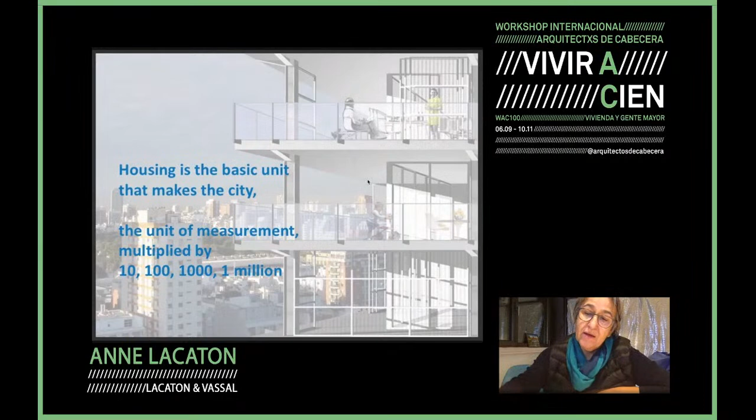producing housing - the cities, stakeholders, everyone - as an essential aim when programming, thinking, and designing housing. So it's important to define clearly what's the idea of inhabiting. Making housing is not just making a space that fulfills all the standards, the requirements, that complies with all the laws, regulations. I think it's much more than that.

Inhabiting beyond the functional means freedom, comfort, generosity of space, of uses, of natural light, of view. So it's very important because housing is a place where everyone in the world lives or should have to live. That's why for us it's an important care for the quality of space, and the word of pleasure of being in a space is very important, because pleasure for housing is a kind of - it's political.

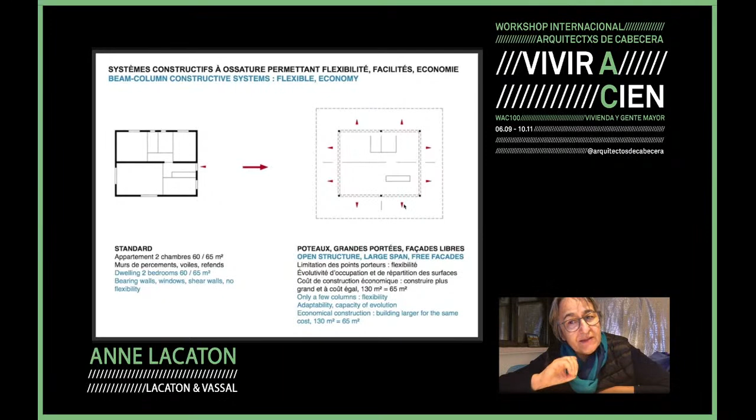So it means also adaptability, capacity of evolution, but also economy, because this prefabricated system of construction allows us to build larger for the same cost. It's clear that if we talk about generosity of space, it should not mean more expensive, because then it's not affordable anymore. So it's important to have this generosity of space in mind, but at the same time define the conditions to make construction economical, so that it allows us to afford this generosity of space.

This way of building, of thinking the space, is also very efficient in terms of energy saving and climate use, because it allows us to create intermediate spaces adapted to any climate, any country's conditions. If it's cold in northern countries, if it's hot in more middle countries, it also allows for passive energy, passive construction.

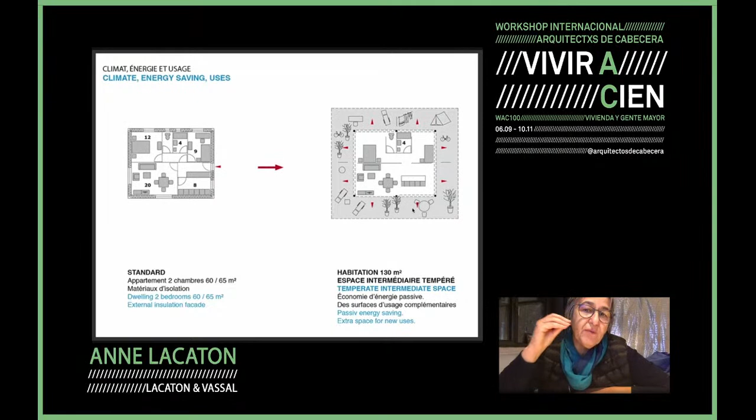At the same time it gives this extra space for new uses. So we always have in mind this extra space, this facility of moving, when we are designing housing. You mentioned in the presentation the first house we did as young architects.

It was in 1992, and our goal was really this: to provide for these people, since this family had a very small budget, and they could only afford a kind of standard house of 60-65 square meters. For us, we were really obsessed by the idea of providing much more than that, because we were absolutely convinced that living in small space was not good conditions of life.

So we worked very hard to design this house with extra space. It's a house of 180 square meters, with 60 meters as extra space, like this greenhouse, and 120 inside in the condition of habitable space, heated and so on.

But this house is also really turned to the outside, it works with climate. It also allows, in this combination between inside space—which is in a way constrained by the program of spaces like living room, kitchen, bedrooms—and the extra space, which is free of program, to create the place where appropriation can happen. In this combination between program space and unprogrammed space, something really interesting happens, which is the freedom of the inhabitants.

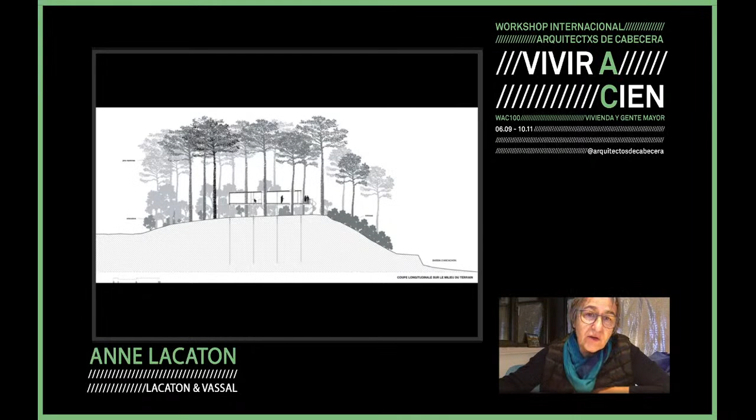So this is the section, and you can see that we did very light, deep foundations in order to keep the ground with no digging, nothing, but just like needles, and all the stability is made in the construction and is not made inside the ground. So the house is raised up, so we can catch also the better view on the sea.

So another project that we did some years later after the first house, it's the first project for so-called social housing in the city of Mulhouse that we completed in 2005.

I must say that social housing, social is probably not necessary to say, because housing is social in itself, and we should not have to add any categorization of anything to social housing, because in fact it's a very bad thing to introduce any kind of category, any kind of difference in typologies in housing: elderly housing, social housing, affordable housing, more affordable housing.

So all of this, for me, is very bad, because the consequence is only to create more and more standards, while in fact we should always start from how to think the space to live.

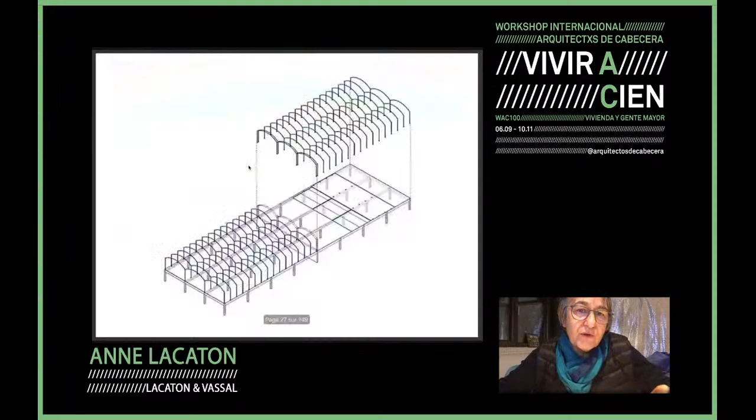So that was the basic structure, which was built like a big loft in the most efficient conditions, and this is the final result. Then the work was how to divide this construction into 14 flats.

We defined some rules to divide this place. The rules were that every dwelling should have at least 2 orientations, even opposite orientations or corner orientation, and that every dwelling should have a space on the ground floor and a space on the first floor, to profit from the 2 atmospheres.

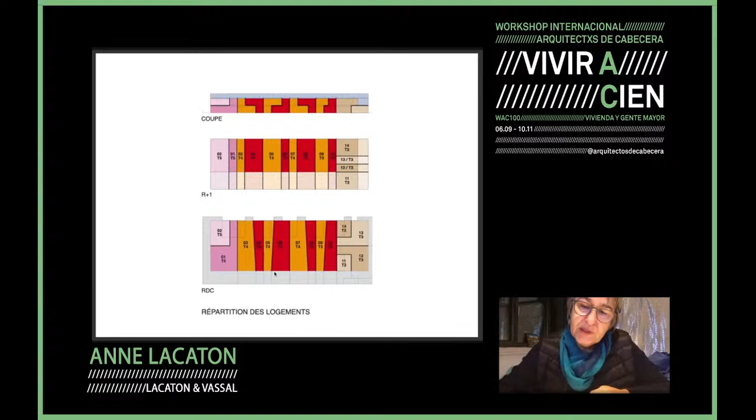Then we decided that every living room should have a glass facade of 5 to 6 meters, so that we could have good light and a good connection with outside. And this was the final result.

We finally arrived to build it and to respect the budget, and also the client respected his commitment to not rent it in function of the surface.

It keeps warm inside, but it's also the only way to save energy while at the same time having large glass doors, because for us it's not interesting to take the problem the other way around and reduce the size of the windows, because it would be bad for the insulation.

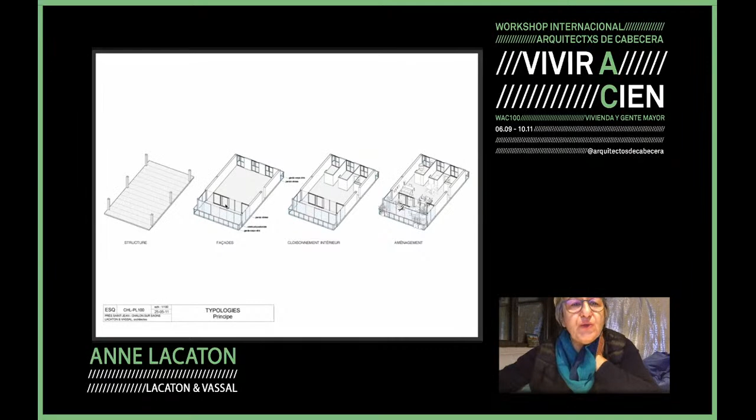With this system, all the separations between the dwellings, the facade, everything is absolutely independent of the structure. So you can choose the best grid, the best dimensions, connected to the elements of construction rather than to the constraints of the structure. So this is the facade, the interior partitions, and then inside, the typology.

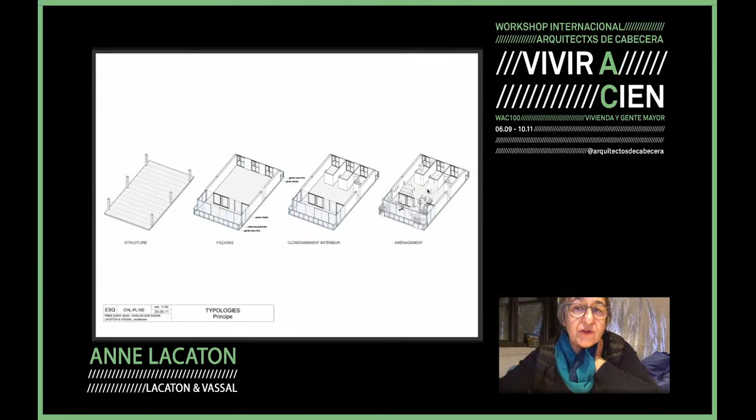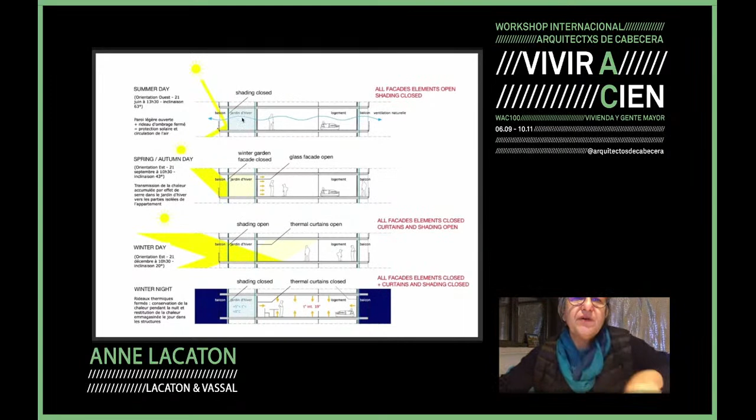passive design: crossing orientation that allows natural ventilation. In summer, the balconies make shadow, and we never have sun directly on the glass facade. The winter garden is a kind of buffer zone, and the inhabitant can play with these four elements,

two facades and two sets of curtains, to manage comfort in summer but also in winter. In winter, we take benefit of the sun to heat the winter garden, and at night the curtains are closed to keep the warmth inside. The winter garden is much hotter than outside, and it's a kind of free temperature, giving something like 5 degrees compared to outside.

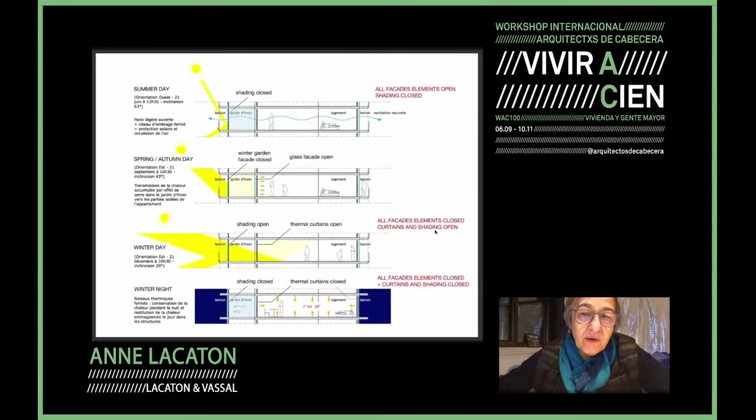So again, it was made within the budget, and the rent is calculated based on the type of apartment, not on surface area.

So it's very important for an architect to think that the design of the project is not the only thing we have to do. We have to be aware of many other constraints, laws, regulations which are peripheral—like the right to build, taxes, and all of this—which are very important, because if you don't understand all of this, it can block a project. If you don't solve all these elements at the same time as the design, sometimes that's a reason the project cannot be built, because these issues block the process. So it's important as an architect to look around, to look behind, to be really curious to know the context of the building.

For us it's probably more difficult to deal with those elements than with the design and construction itself, but it's extremely important to understand and to be curious about all of that.

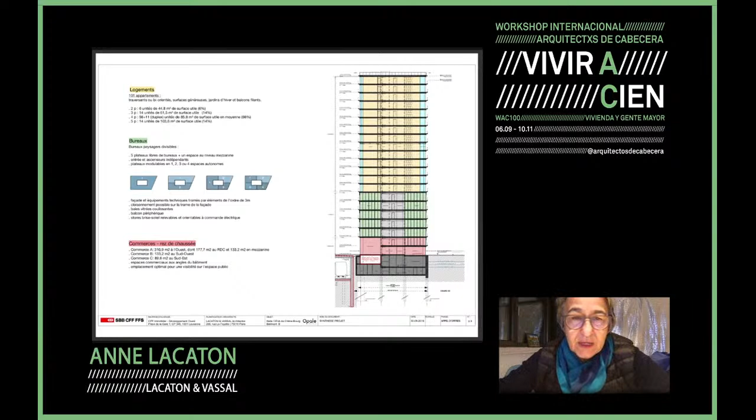So it's a mixed-use tower with 2 basements, a ground floor more dedicated to retail, then 5 levels for offices, and 14 levels for housing. Here we also worked with the same principle for

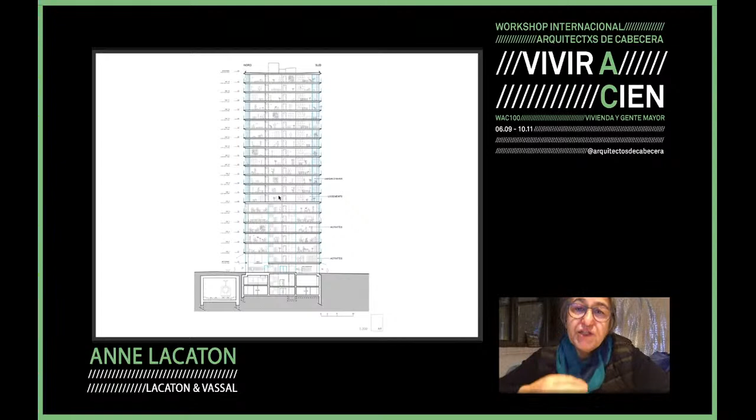the housing, giving extra space through winter gardens. It's clear that in Switzerland housing standards are not as restrictive as in France—units are a little bigger—but again, giving an extra space like a winter garden, in between inside and outside, was a quality we could provide, and the efficiency in terms of energy saving allows very open and glazed apartments.

So this is the shape of the building, given by the plot. This is an office level—the columns again form an open system with columns and floors.

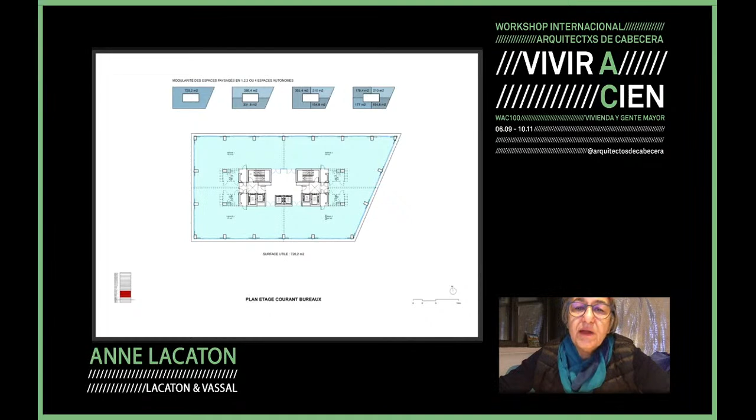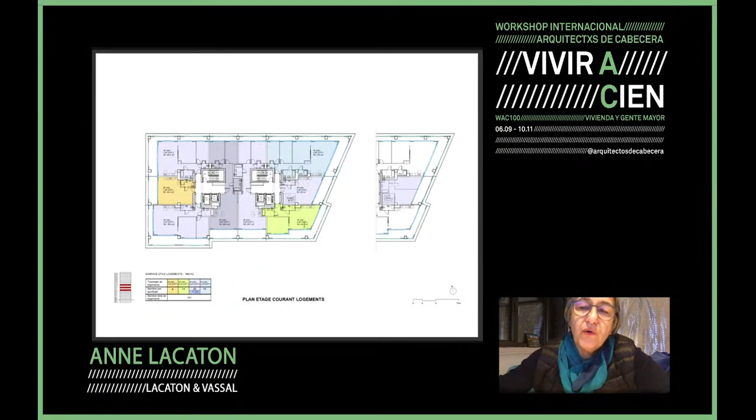And this is one level of housing with 2 staircases, which allow it so that no apartment has only a north orientation—all apartments have a good orientation, crossing orientation when possible, or a corner orientation. All these apartments also have this extra space—a winter garden all around, plus a balcony—giving a nice condition with good landscape around, with mountains and so on.

So it's clear that quality and generosity of housing, affordability, and diversity of people and ways of life are the essential conditions to make the city.

And it's clear that today this is also a problem, because in many places housing has become a financial product, which is really a bad thing—it works against quality of space and generosity. It's not really possible now for everyone to live in the city, because city centers are more and more excluding normal people, since the cost of housing and the scarcity of plots makes housing so expensive and so difficult to access.

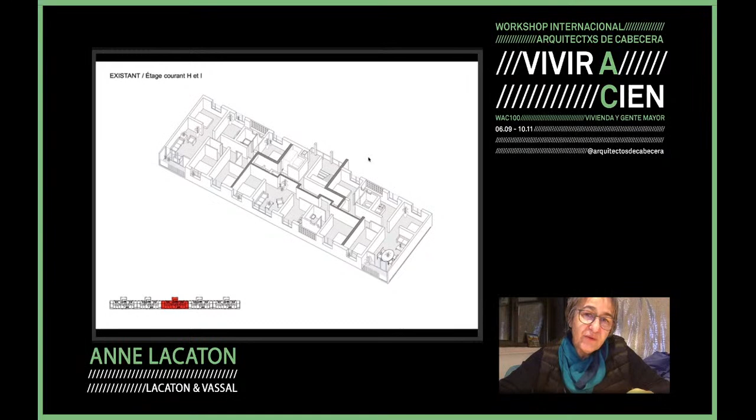So the proposal we made was to take really good care, to pay attention very carefully to those situations, but at the same time to do all the improvements necessary to upgrade the quality of these buildings. The first was to improve the space for living and to give additional space.

We proposed to add in front an extension of 4 meters, and then to open all the windows so that they become large doors, opening all the rooms of the apartments to the winter garden. This is a very small part of the long buildings.

And then there were some other works inside, like renovation of electricity, of bathrooms, of elevators, fire security, and so on. All of what makes a good upgrade of the quality of the building, and restarts a new life for 50 years in very good conditions of living, now and later.

And all of this we proposed to do on an occupied site. It means that all the buildings were fully occupied with no vacancy, and we proposed that all these works could be done without removing the inhabitants, so they could stay in the apartments during the work.

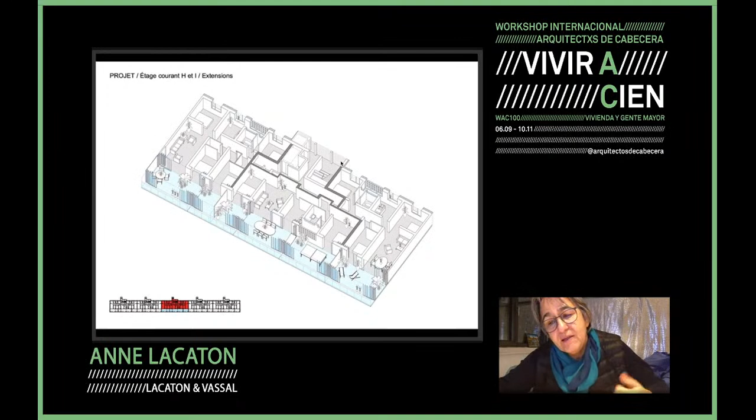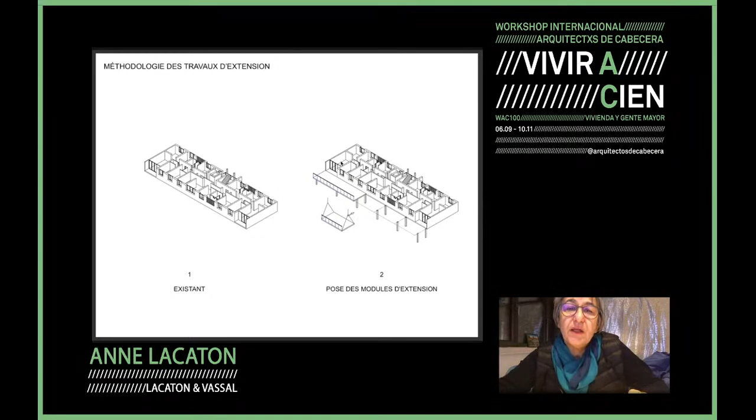So it was necessary to define very early the process, the method of construction, to build these extensions from the outside, and how to deal with interior work so that it's possible to stay home. It was possible for the inhabitants to use an empty apartment during the day to stay when there was too much noise or too much dust or something like that. But every evening they returned to their apartment.

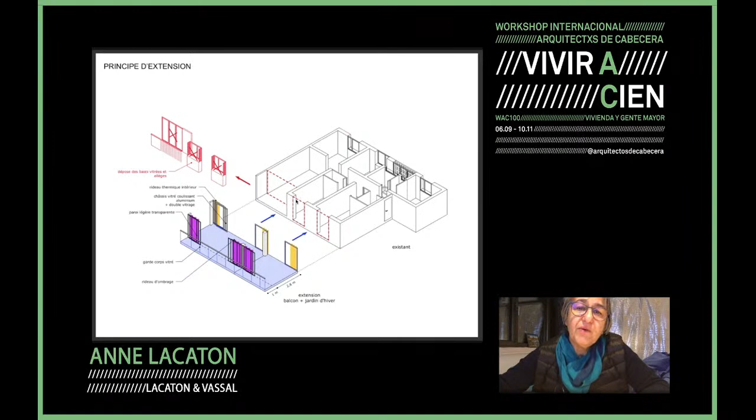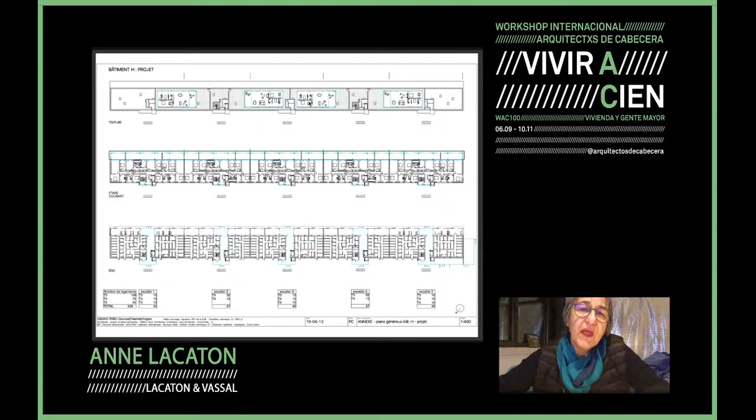So the process was to build first the extension with the new facade, to remove the existing doors or glass windows, to cut the parapets in order to create these large doors in place of the windows, and to do it for all the apartments without any exception, from the ground floor to the last level. We also used the opportunity of the flat roofs to create additional little houses on top.

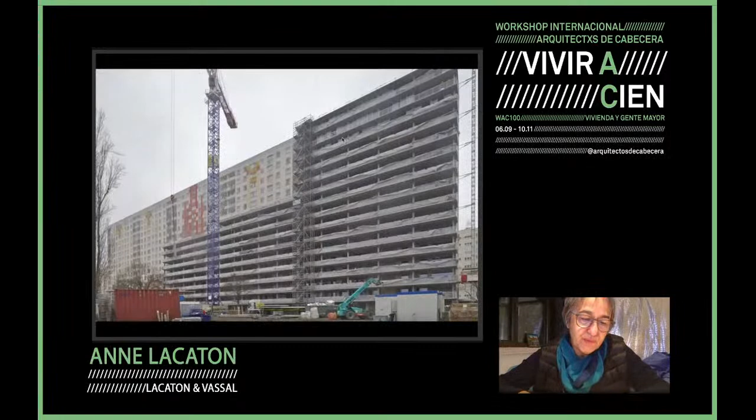So the process of construction was this one, starting from the existing building. In fact, there were two independent construction works in a way: one for the extension, done from the outside, and one for the interior works, which followed a different organization. But they both went together, with different teams and different schedules.

And this is the result after the extension. All the elements were prefabricated off-site and just placed from the truck onto the facade. Before that, we did the foundations and columns, because this extension could not be supported by the existing construction. So it was important to make them absolutely independent in terms of structure, with foundations, columns, and so on. They are just tied to the existing building for wind solidarity.

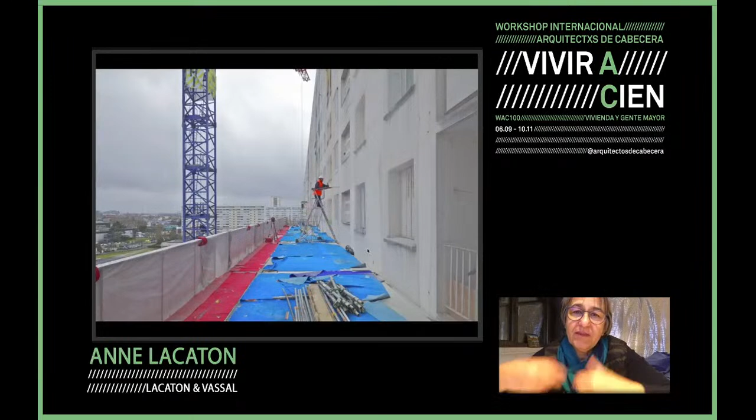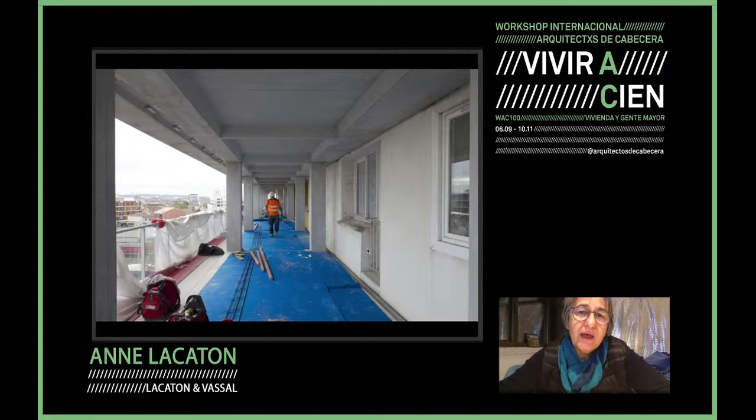So with two guys guiding the module, the module was placed, and then they were preparing the connection for another floor, the columns, and so on. And after a few floors were built, it was safe enough to start the process of changing the facade.

Until now, the inhabitants inside are not really disturbed, because there is not really a connection. But at the moment we start the process of opening the facade, we start this kind of disturbance. The method with the contractor was that the replacement of the facade for an apartment should be maximum 2 days, and that was a commitment towards the inhabitants that at 99% was done.

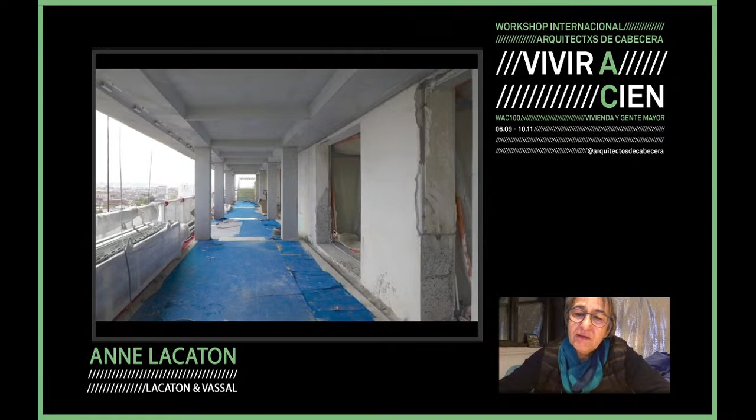So the first day we cut the handrails, and the frame with the glass windows are ready, so they can bring it, and then the winter garden is nearly finished. Some little weeks later it can be opened and given to the use of the inhabitants.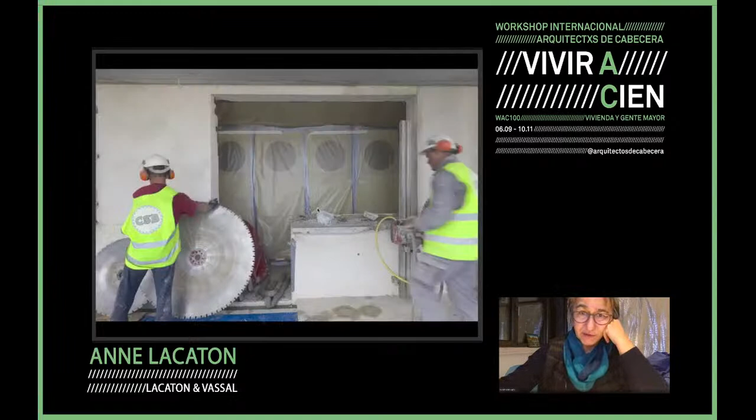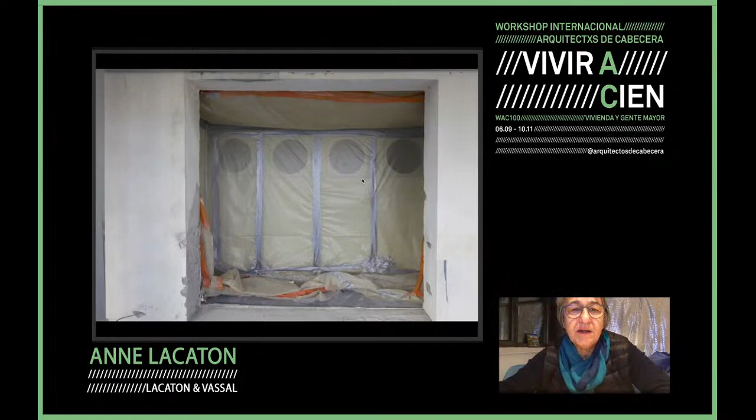So the processing itself from this facade with very small windows, the process of cutting the handrails. Behind we place this light partition to prevent the dust and noise and so on, and also to make possible the life inside during the 2 days of replacement of the facade. And then the glass windows come, and the process of finishing the old wall can be made later or at the same time.

And from the inside, which is very important for us to do this, the design from inside out means that what is important is to improve the quality of living, the quality of the space. The first goal is not just to change the facade and the image of the building. So it's important to think how it will be afterwards.